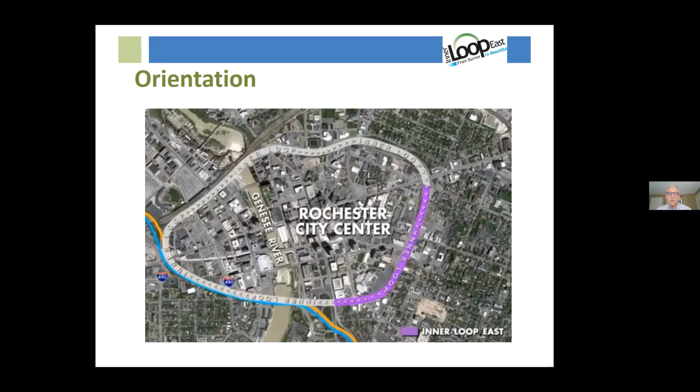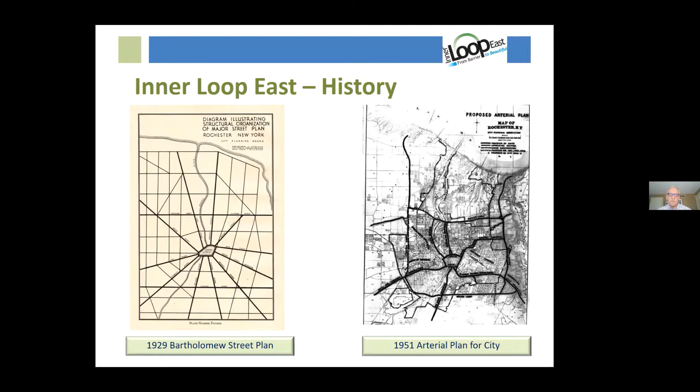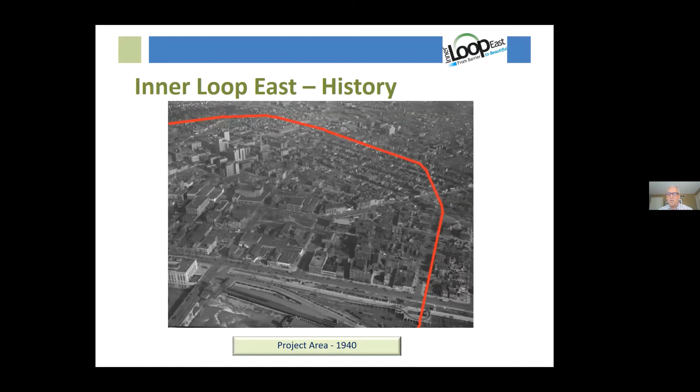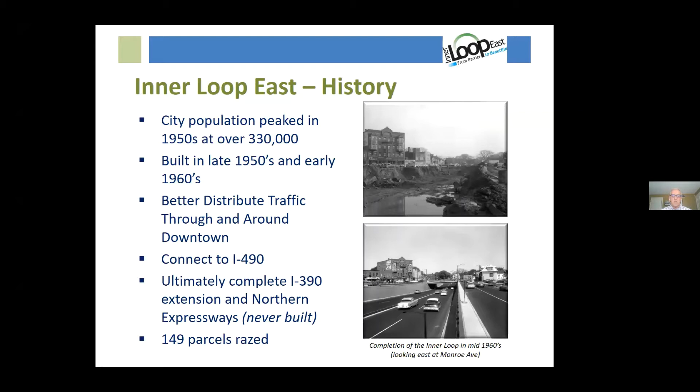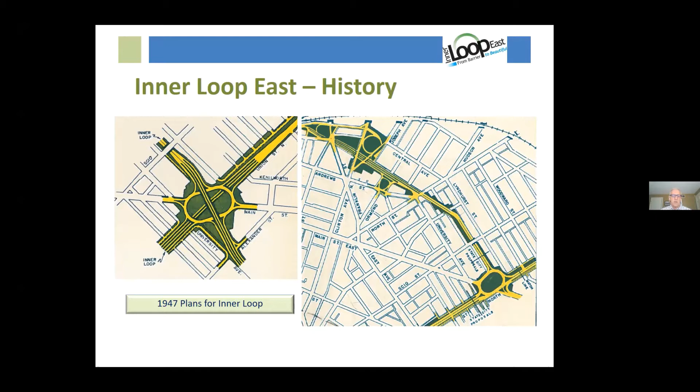I just thought this design was interesting that Eric found in the history and plans for the Inner Loop. On the left is the intersection of Main Street and University. As they planned it, it's kind of this crazy roundabout thing. I'm not sure which level is which, but from a historical perspective, that was back in '47—the Inner Loop was finalized in 1964. Obviously it changed to just a standard bridge, Main Street bridged over the sunken Inner Loop.

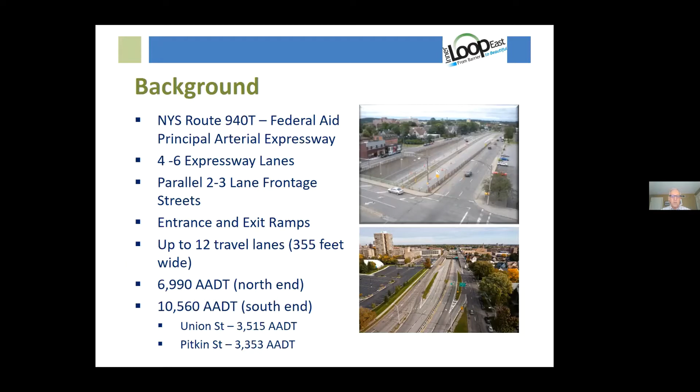And the traffic numbers—this is the geeky part—the AADT, which is the average daily traffic: at the north end, 7,000; at the south end, 10,000; and about 3,000 on Union and Pitkin Street. That's pretty close to the numbers we see coming down 2-lane Monroe Avenue every day. So obviously this road was way overbuilt for what was needed.

It had structural issues—geometric deficiencies, safety concerns, all the things you can see there. And it certainly depressed the land values adjacent to the road. You can see how that bridge under Broad Street had crates underneath it holding it up. Some of that was because we were hoping this project would get funded, and that's why we took that measure—we didn't want the state rehabbing the bridge and then five years later we'd be tearing it down.

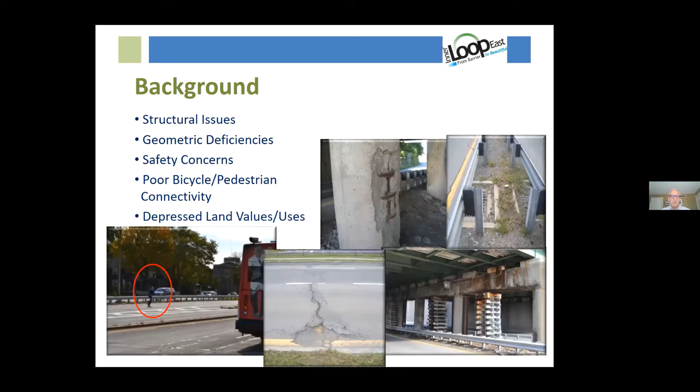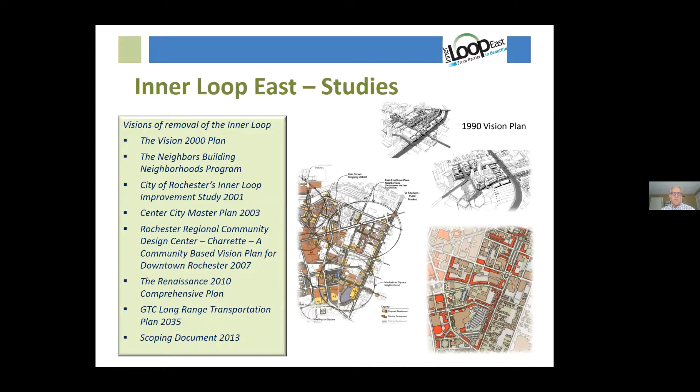The design center had a charrette in 2007—I was at the city at that time—and it was a great process to get some ideas about what that would look like. It made it into the city vision plan and, as importantly, the Genesee Transportation Council long range transportation plan, which is always needed to get funding for a state project. Scoping documents were completed in 2013 and had made that recommendation as well.

So why do we want to take it down?

Pretty obvious reasons and placemaking reasons: reconnect neighborhoods with the center city, create a mixed use infill development site, enhance a bike-ped environment, improve livability, and try to remedy a mistake of the urban renewal era, and then right-size the overbuilt infrastructure. As we've talked about, it was just way too much road for the traffic.

So in comes the Tiger Grant, and as part of that we did some benefit cost analysis, which was required to get Tiger funding. You can see what the benefits were there. Using the federal discount rate, you had to get to a number close to 2. We got there, and so it was thought possible to move ahead and get Tiger funding for it.

It took us 3 times to get the funding. We worked with Stantec to help us refine. They were the folks who had put the design plan together, and we worked with them to refine our application a little bit better based on feedback from USDOT. We requested $17.7 million for that project.

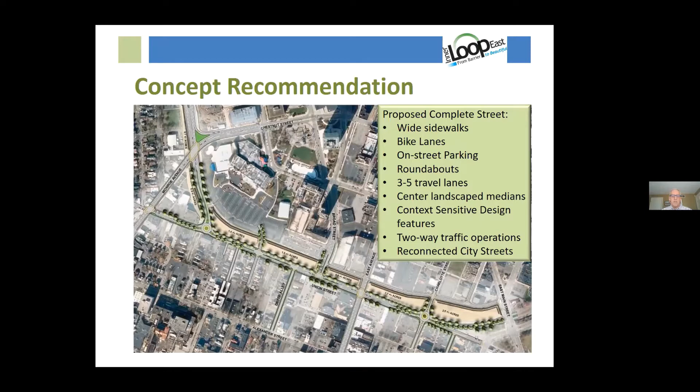So the final design, we kept most of those things. A two-way cycle track was added because there was a lot of input from the bike folks about how this would be a great place to do it, and we had the space to do it.

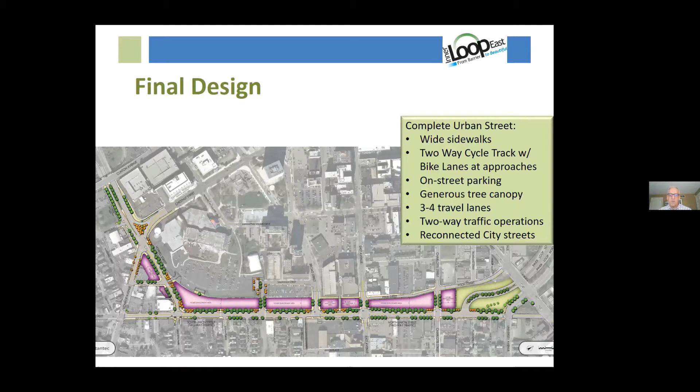We reconnected all the city streets. Talking to the folks at Stantec and the folks at the city who worked on the project, I think if we had a do-over, seeing how it runs, and this is certainly something that could happen in the future, we would like to have seen this cross-section. We would have liked to have had the island still in there. The elimination of the median was replaced with a 3-lane section.

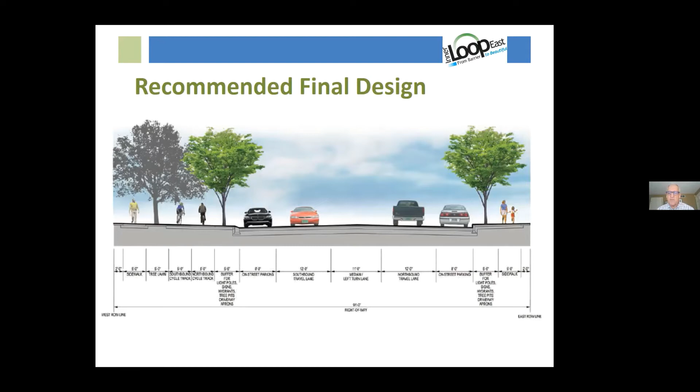This was thought to allow turns. The reality in hindsight, as we talked about back and forth, is that only Gardner Park in this section provides connectivity to another street. Many of the streets along that section are dead ends. So providing that turning lane could have been done another way. We can still do that, certainly no reason why we can't, but funding is always difficult for redos of these kinds of projects.

So here's the inner loop during construction. Construction went well. We had the benefit of Union and Pitkin Street through the whole construction period, so we didn't really disrupt business or traffic too much to put it in, and as you saw, there wasn't much traffic on it in the first place.

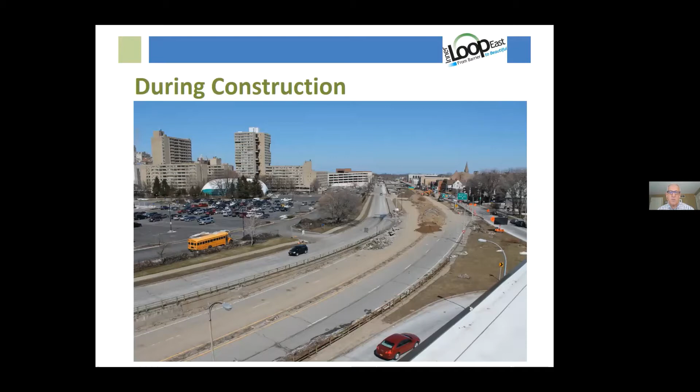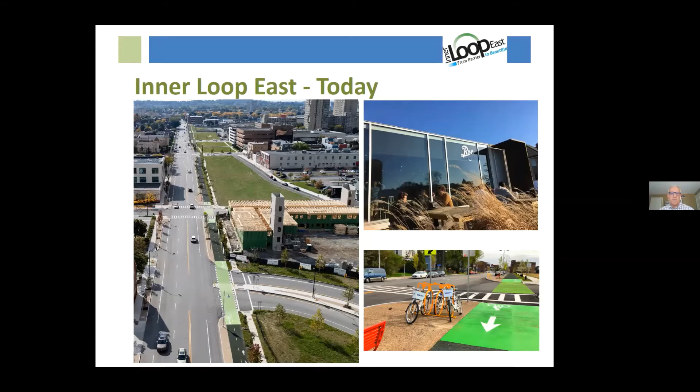And here's the inner loop east today, well actually probably a couple months ago, because there are more buildings going up now. Those seen here are some of the new buildings that are completed: the corner at the top left is Charlotte and Union, and at the corner of Broad and Union on the lower photo, and then the existing ROC Brewing, which has nice parking in front of it, and people can access it from both directions, which is great.

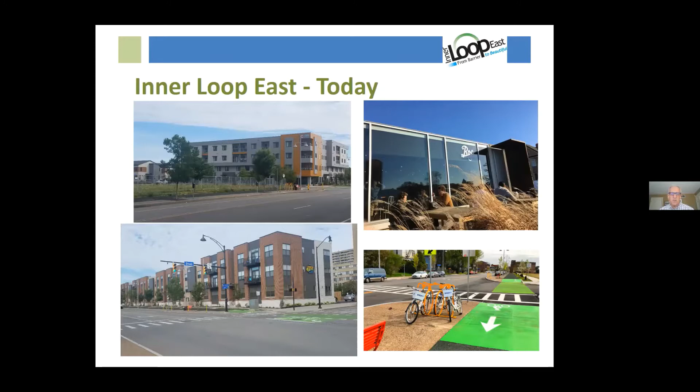So what happened then? We did this thing, we freed up 7 acres of land. When does the placemaking kind of things, the building and the street infrastructure that happens, how does that happen?

So land use and design studies were done. Public meetings were held on development goals. First RFPs went out in 2016. First building permit was issued in 2018.

We had a complicated land acquisition from the state back in the late 40s. The state and the city partnered and bought the land jointly. So you would think it would be easy for the state to turn that over to us, or for us to work some kind of deal out, but the survey, design, and money that had to change hands for that to happen was a large effort. The development wasn't going to happen until we could do that, so the city was very energized to get that done.

And then the first certificate of occupancy was issued in late 2019, and all of the parcels along that stretch are spoken for. So that's great.

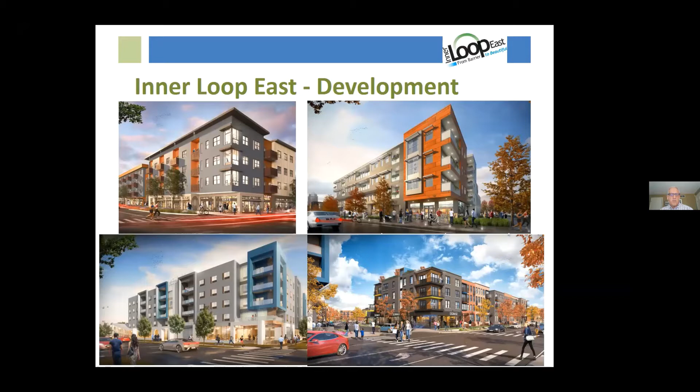But the other buildings have started, and here's a couple of photos of some townhouses, the extension of those ones you saw in the earlier photo, and a development on the other corner of East Avenue that is going up. That's going to be a great development.

On the left side, it's important to note that the Strong Museum took the impending project back in 2013 to heart. Through the work of their CEO, Rollie Adams, and CJS Architecture, they decided to develop a master plan. I think they were just happy to go along with a 600-space flat parking lot in front of their building, which was kind of a buffer for them from the inner loop. But once they realized a road was going in, I really give them credit, they went ahead with this master plan, which resulted in the recently completed Lego-themed parking structure, which made space for a hotel, the row housing, and will also line up with their continued development of more museum space and amenities like restaurants on campus, to make the Strong Museum truly a destination and really cement the placemaking along the street.

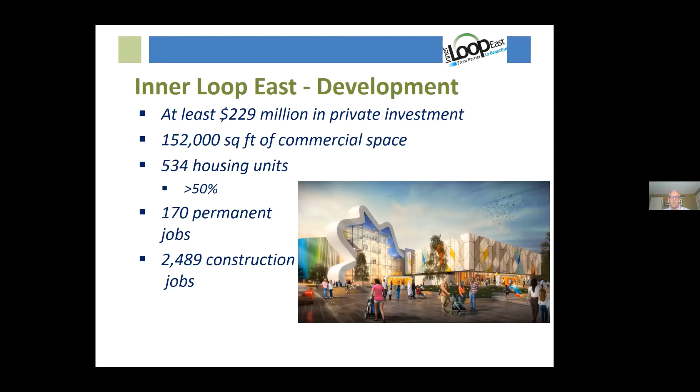I want to talk a little bit, because I think it goes along with placemaking and leads into what Eric will talk about with Inner Loop 2. I want to thank Brett Garwood for this information. I think there's this narrative about housing that any housing downtown is unaffordable. These are the numbers for Home Leasing options, which was a couple of those buildings I showed you, along with their Charlotte townhomes and some housing they have just off the loop on Charlotte Street, and it shows the affordable numbers for their housing.

I think it's impressive that we're seeing this affordability right within the downtown area and walking distance to where a lot of the jobs are. Brett had also reached out and talked to the other housing developers, and when you count all the projects in the loop, which is close to 600 housing units, a third of those units will be affordable to low-income households earning 60% of the AMI, area median income.

30% of the units are affordable for folks making between 60 and 100% AMI. 20% of those will be affordable to somebody who works and earns under $12.50 an hour. Rents are going to range between $450 to $3,000 per month. And 55 of those units are supported by housing for the formerly homeless or have project-based subsidy.

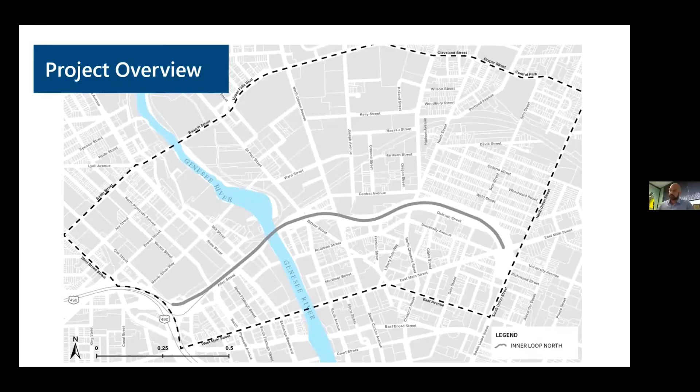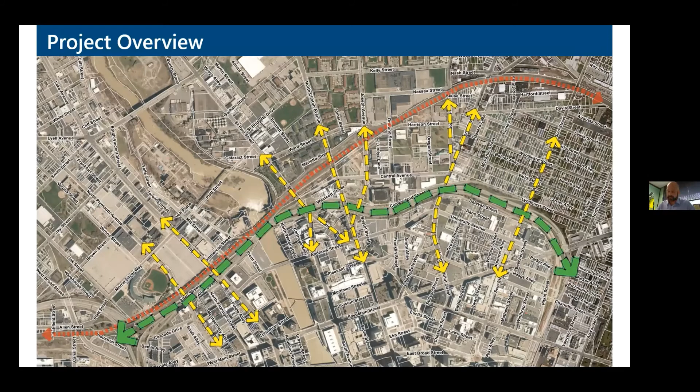Keep in mind that this is a planning study, the Inner Loop North Transformation Planning Study. It's a $1 million planning study, but it's a planning study nonetheless. The funds were secured by Assemblymember Gantt a few years back, and the project has been underway. Hard to believe now, it's been underway for what, 9 months.

This is not a design project at this time, right? It will result, think of it as an alternatives analysis. It will result in a preferred alternative or alternatives that can be advanced to design. There are no commitments. There is no presupposed outcome at this time.

The most important component is to listen to and work with the community through robust public engagement.

Goals of the project are to reconnect neighborhoods, just like we did with Inner Loop East, making it easier for bicyclists, pedestrians, and transit users to navigate our streets and better connect across the city and between neighborhoods. I want to restore a human-scaled street grid. Human scale is important, right? We want to design for people, not for cars.

We want to create a sense of place. That is what our Rochester 2034 comprehensive plan is all about, right? Placemaking. We see this project as critical to that effort.

We want to integrate with ROC the Riverway, our other major investment program that we have going on. You may not realize this, but the Inner Loop does cross the river, right? You may not notice it as you barrel across the expressway at whatever speed you're comfortable going at, but it does, and that expressway bridge does form a formidable barrier between downtown and High Falls, and makes it difficult for us to complete the Riverway Trail system along the river.

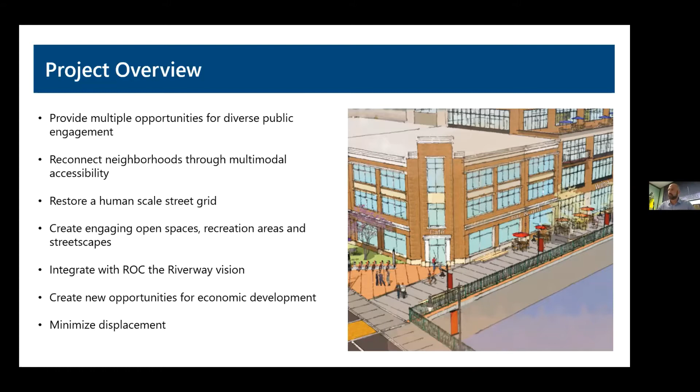And we recognize, of course, there are people who live and work in this area today. We want to make sure that whatever we do here supports them and discourages displacement, minimizes that by coming up with strategies to ensure that people can live and work in the neighborhood.

Although it's a City of Rochester project, it is led by a consultant team. We have engaged the services of Bergmann Associates as lead consultant. They are being assisted by Kimley Horn, Trowbridge Wolf Michaels Landscape Architects, SAA / EVI, LU Engineers, and RIT Center for Urban Entrepreneurship, all assisting Bergmann with different specialized skills for delivering this project.

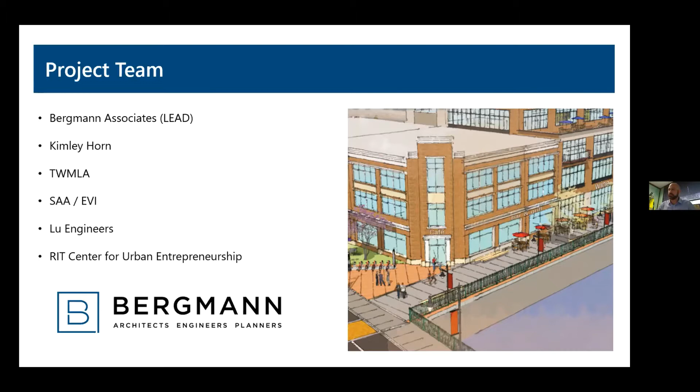Central to this project is the community engagement strategy. What you see here, this is the intent of what we're scoped to do. Obviously, conducting public engagement in the midst of a pandemic is a bit challenging, to say the least.

We are active online and on social media. We have obviously not been able to get out and do the pop-up events, public meetings, and other things at this time that we had hoped to achieve by now, for obvious reasons.

However, we are making plans to get out there now that our area has been approved for gatherings of up to 50 people, I believe. So we're making plans for some small group type events in the very near future, so that we can start moving our engagement strategy forward.

A project as large and complex as this requires technical expertise, so a technical advisory committee has been convened. It involves representatives from multiple city departments, Monroe County departments, New York State Department of Transportation, RGRTA, Genesee Transportation Council, and others to provide direction, technical feedback, review materials developed over the course of the project, consider public input, and assess the various alternatives, ultimately leading to the preferred alternative or alternatives.

We've also convened a community advisory committee with over 40 stakeholders from the project area, including residents, property owners, business leaders, advocates, institutions, etc. The goal is for the Community Advisory Committee to help build trust in and support for the project, providing perspective on alternatives and recommendations, and helping promote engagement in the community. We want to reach all corners of our community and get the most possible voices heard.

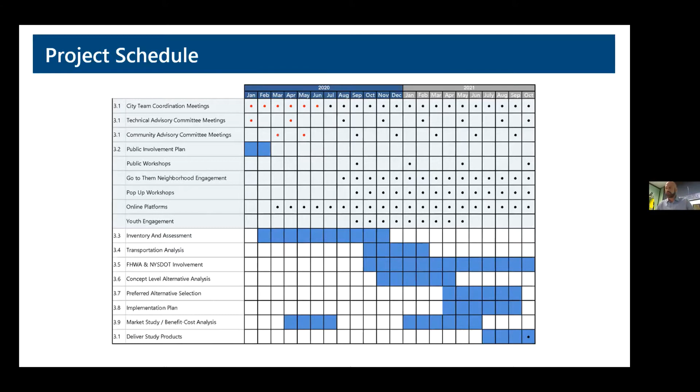So we'll also be able to begin conducting public engagement on a more face-to-face basis. We're now looking at a fall 2021 completion, meaning we will have a preferred alternative or alternatives to then advance to the formal scoping and design process. This is the general scope of work.

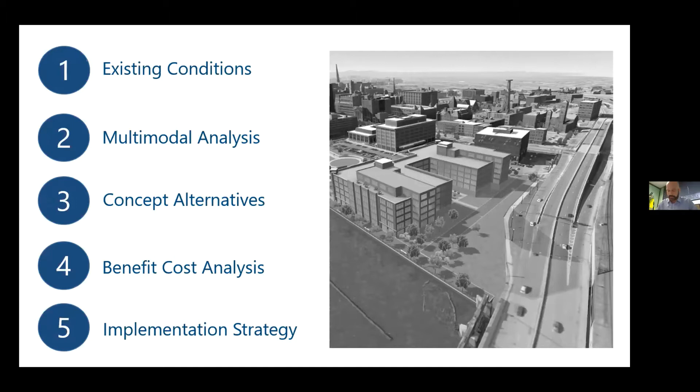I'm briefly going to describe this, mindful of the time. The first step is to understand how things are today, so we're going to look at land use and zoning, traffic data, structural conditions, environmental conditions, etc. that exist today. This gives us an idea of how things currently are, so when we look at choosing alternatives, we can benchmark against what exists today and forecast out to what we may experience in the future.

Some examples: this is current estimated traffic volumes in the corridor. You can see going from east to west, traffic picks up substantially. These are estimated volumes, or the most recent actual counts, not counts conducted directly as part of this project since we haven't been able to do that yet. This project will do in-field data collection, which will revise this, but it gives a good idea of what's out there today.

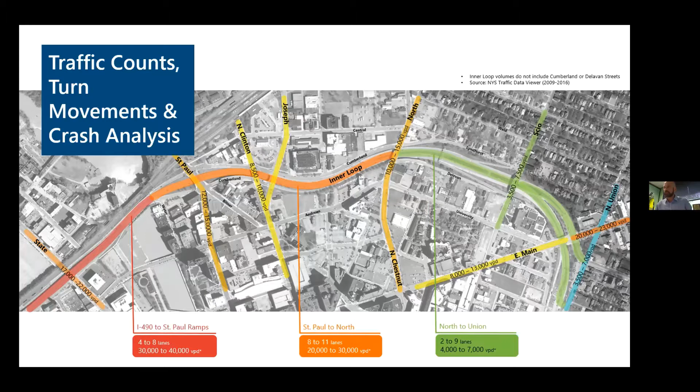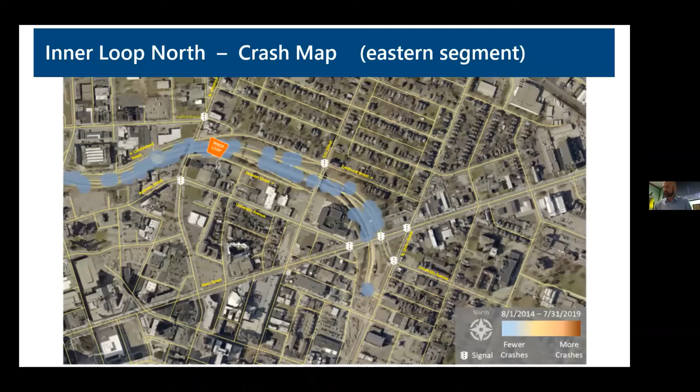Since one of our primary goals of the project is to improve conditions for bicyclists, pedestrians, and transit users, a thorough multimodal accessibility analysis will be conducted that will help us propose alternatives to achieve the goal of multimodal accessibility.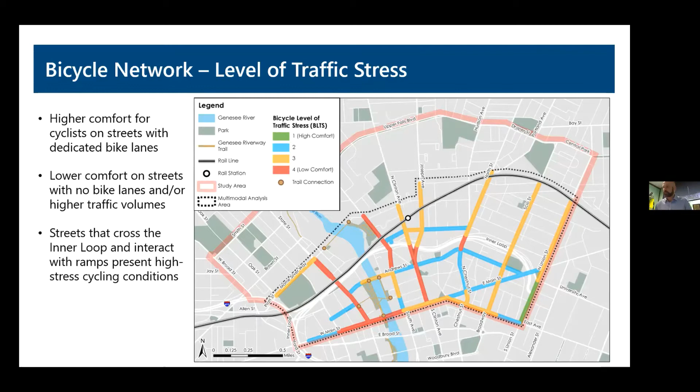This slide gives you an idea of what we'll be looking at. One example is the bicycle level of traffic stress in the project area. Red means lower comfort for bicyclists, and green being high comfort, based on a number of factors. This gives you an idea of what we'll be looking at as part of the multimodal analysis for the project.

Jim mentioned Inner Loop East. A market analysis will be doing the same type of work as part of this. The market study will inform the scale and type of development that could occur if and when the project moves forward. I'll note that the market study completed for Inner Loop East turned out to be extremely accurate. I think the overall scale and density of development we're currently seeing out there is consistent with the market study produced for that project at that time.

It's really helpful for us to get an idea and to plan ahead for what could be. So it's great to see that work was such a success.

The market analysis then leads directly into a benefit cost analysis, which seeks to answer the question: will the project benefits justify and exceed the project costs? It's a federal requirement now for any competitive federal transportation investment programs.

It was a hugely important factor in our successful award of federal funding through the TIGER program for Inner Loop East. That project, as you saw earlier, had a roughly 2 to greater than 2 to 1 benefit cost ratio. And I think if you look at the numbers today, it's even higher than that based on actual project costs and actual benefits seen so far. But that's just me pontificating—don't quote me on that.

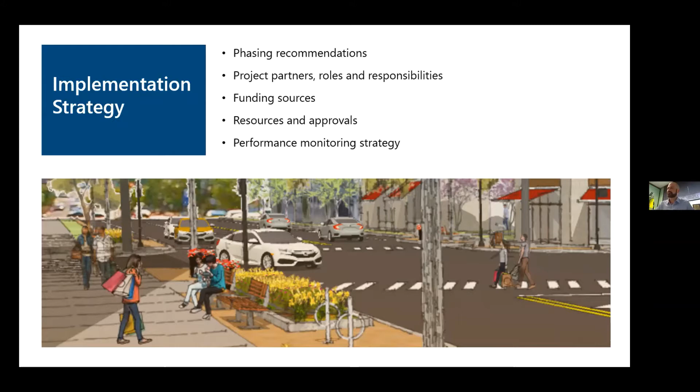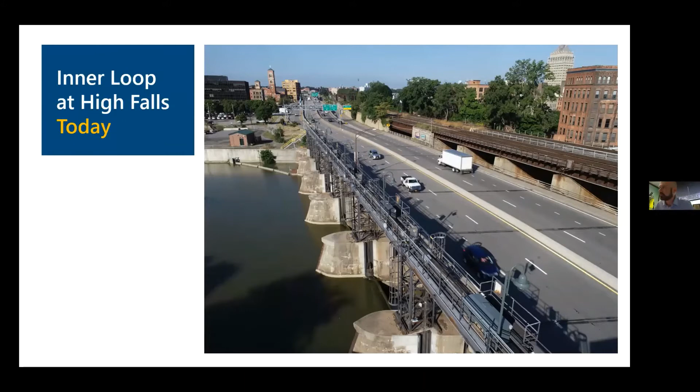I thought I'd close with some high-level concept visions. As I said earlier, these were produced early on by the consultant team. These are not actual proposals, they have not been evaluated against actual data, but they are great ways to get us thinking about what could be in the corridor—looking at some potential areas along the corridor and what some ideas could look and feel like. So this is a picture of the Inner Loop Bridge over the river, with the Central Avenue Dam right immediately adjacent to it.

Maybe there's a way you can bring the bridge more up to a street scale from an expressway, provide a two-way bike facility, making it better as a street connection. Then you can interconnect with the street grid, as you'll see over to the west there—you can see where Mill Street comes in. That's one example.

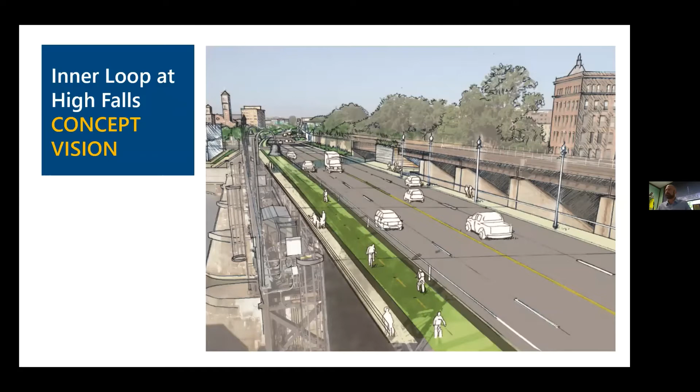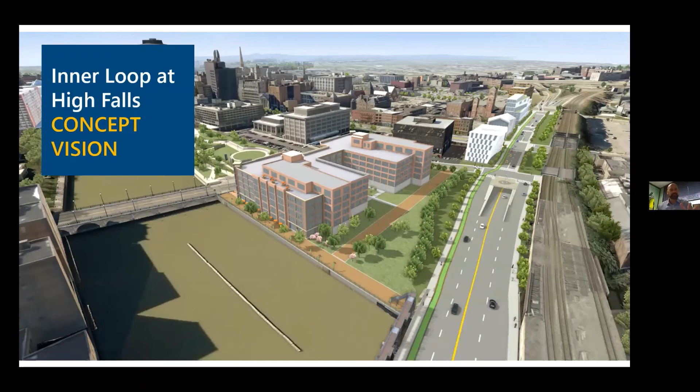There's another example: maybe there's a short tunnel section. Doing so would enable us to reconnect other streets and create further development along the corridor. Again, not an actual proposal at this time, just things to get you thinking about what could be.

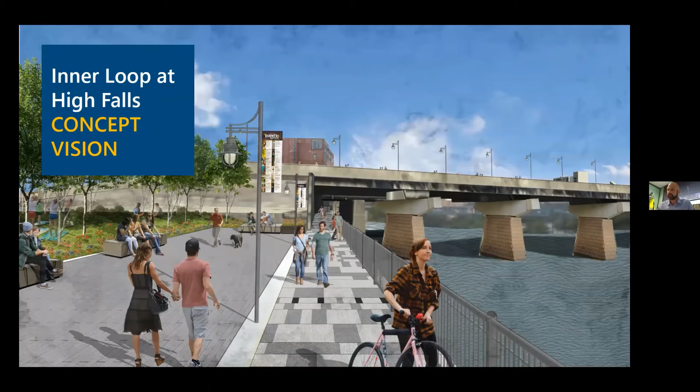What if the bridge, no matter whether it's rebuilt or otherwise, were raised? Would we be able to complete the trail system, put it right underneath, and directly connect into High Falls through there? It wouldn't ultimately look exactly like this because we've got the Central Avenue Dam right there and need to preserve that, but this again gives you an idea of what could be.

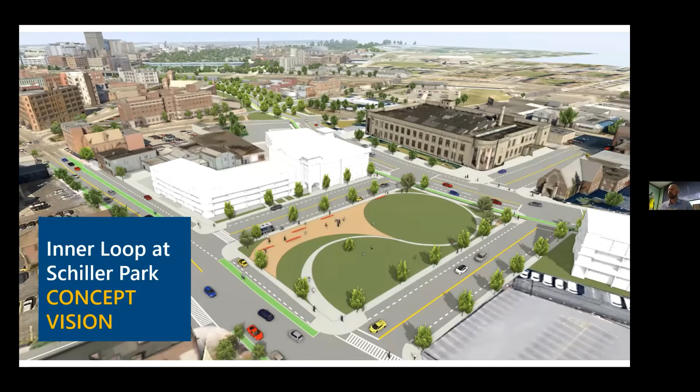Over by Schiller Park, or formerly known as Franklin Square, a kind of moribund park next to a reclaimed brownfield site and adjacent to this expressway—well, if we eliminate the expressway and clean up the properties immediately to the west, which we are in the process of doing, maybe we can not only reconnect the street grid but expand that park and develop mixed-use properties that frame that park space, as well as address the street, creating a much more rich urban environment through here. It's another view of what could be in that area. This is Cumberland Street, right?

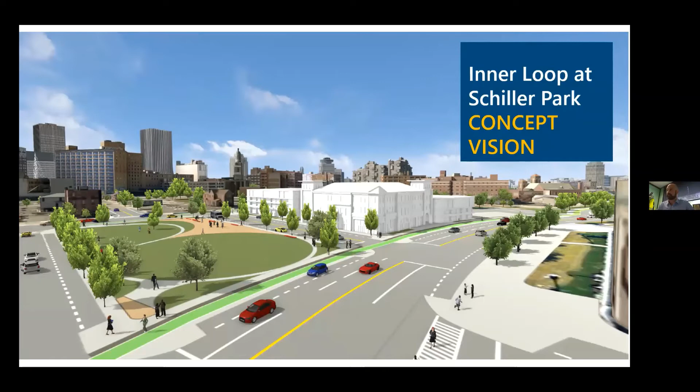And another would be over by World of Inquiry School. The school does not have playing fields. It's hemmed in by the inner loop and by the surrounding street network. But if the expressway came out here, maybe they could have playing fields and green space that could also be actively used by the community as well. So those are just some examples of things that maybe we could look at. Again, nothing that's set in stone, but all things that we can look at.

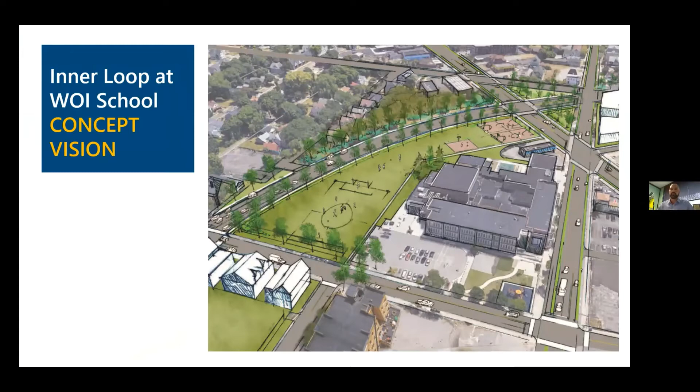Good afternoon, everybody. It's really nice to be here again. Well, actually, I wish I could be there in person. I really enjoy my visits to Rochester.

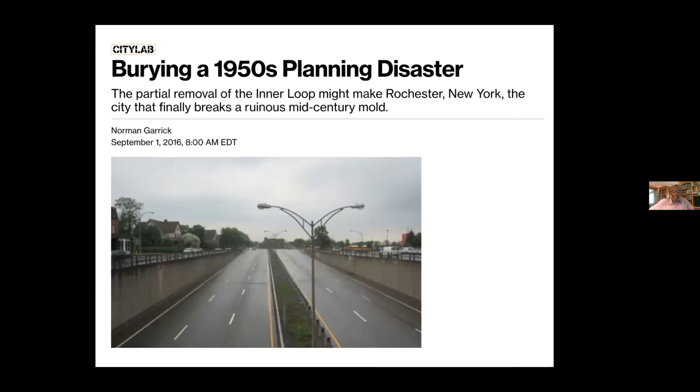So around 2014, 2015, I made three different trips to Rochester to give talks. And I was so excited when on one of the trips I saw the mud being taken from the lake and being dumped on the freeway. And I got really excited and I went back and I wrote this article for CityLab. And it became, for weeks, the top read article in CityLab. And it's interesting because it really shows the national interest in what is being done in Rochester and the national interest in this issue of freeway teardown.

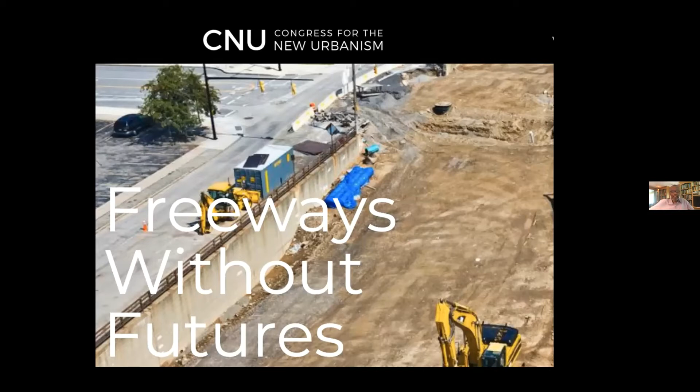And this is represented by this report from the Congress for New Urbanism, which each year puts out Freeways Without Futures, and they get up to 60 or 70 entrants from around the country trying to get on this list. The thing about Rochester is that there are lots and lots of people talking about removing freeways. You have actually done it, and that's why this is so exciting.

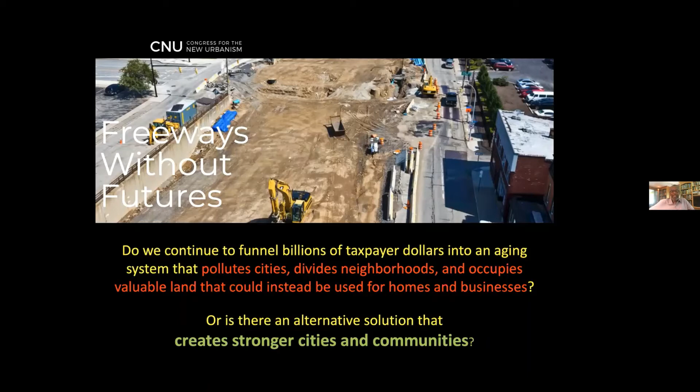So to take a quote from the Freeways Without Futures document, this is what they said we are trying to achieve. We need to stop continuing to funnel taxpayers' dollars into an aging system that pollutes cities, divides neighborhoods, occupies valuable land that could be used for homes, businesses, etc. We need to look at alternative solutions, and that's exactly what we're here for. We need to create stronger cities and communities.

So that's our task. How do we go about creating stronger cities and towns in our country? How do we go away from the disastrous experimentation of the 1950s, 1960s, and 1970s to start creating places that people can love and live and have a high quality of life in again?

And this is probably why we are in the strait that we are in right now. So I think it's really important to understand why you have been able to make progress in Rochester in moving forward. And one of the reasons is I would credit the Design Center. There are not many cities in the country that have been able to get such an elevated discussion going about urban planning. And that comes from having a center such as the Design Center, which brings in expertise in all the different areas that must come together in this very complex field of endeavor.

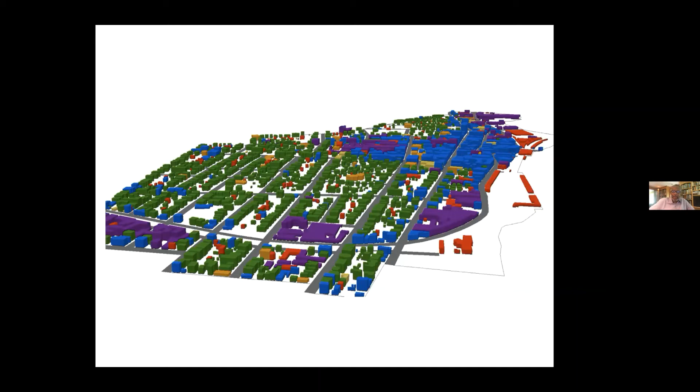This is Bridgeport in 1913. This is Bridgeport now. It's hard to recognize that this is the same place. And we can see a lot of the damage that was done.

For example, this was a city that could pay its way. Most of the buildings you saw here were taxpayers. In this picture, the only taxpayers are the buildings in blue. So no wonder the city goes bankrupt—everything else is on the dole in this city.

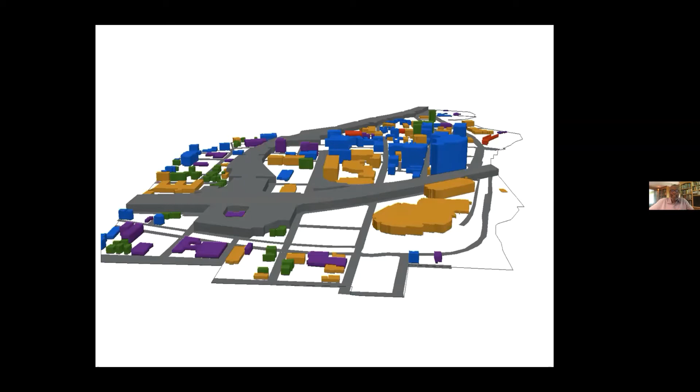So this is what we have created: 62% of the land area in this city is devoted to car storage or car movement. Rochester is not much different from this, and the transition that went on in Rochester is not much different from what you see here. So what we're trying to do is get back to a city that is more functioning than what we have created.

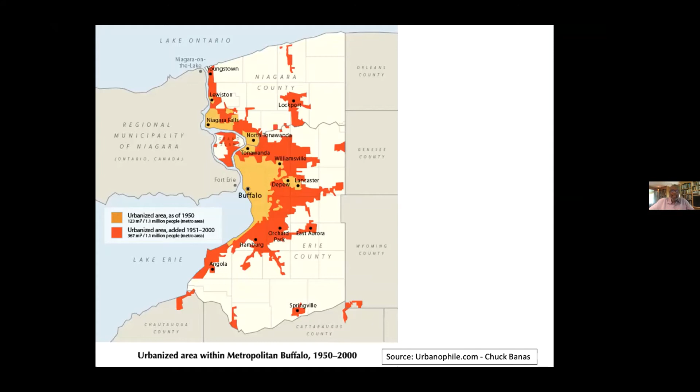Another set of statistics that, again, I haven't done for Rochester—this is from Buffalo, New York. In orange is the extent of the Buffalo metropolitan area in 1950. In red is the extent of the urbanized area in 2000. And you would think that with this explosion in land being used for the city, there would have been a corresponding explosion in population.

This is what has actually happened in Buffalo. That's the increase in land. That's the increase in population, or lack of increase in population. I am virtually sure that a similar analysis of Rochester would show exactly the same thing.

This is the definition of a stagnant place, a place that is past its glory, but that doesn't mean that a new day of glory could not come. In addition to what happened with the entire metropolitan area, this is what happened with the city of Buffalo.

Population went from 600,000 to just over 200,000 right now. So we had an explosion of the metropolitan area without an explosion in population, and we had an implosion of the city. So basically we were moving people from the city of Buffalo out into the surrounding areas.

Why this is a disaster, why this is a problem, I'll ask you to think on this map, the area in which you live, and think of the cities and regions that are doing well. Think of places like Chicago, Toronto, Burlington. Those are all places that have strong inner cities. If we are going to have these northern tier New York cities come out of the doldrums, we have to find some way of restoring the character, the vibrancy of the central city. It's not going to happen with continued growth only in the suburbs.

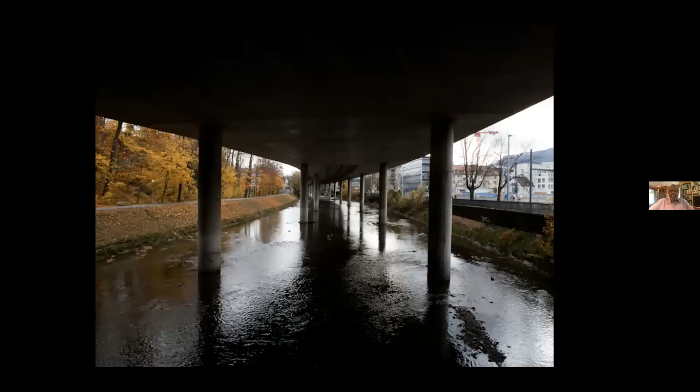Again, they made decisions in the 1970s to change the direction they wanted their city to move into. And some of the implications of that, one of the big implications, has to do with people being killed on our city streets.

In Amsterdam, the chance of being killed by a car if you were a pedestrian was 2 times the rate in the US in 1975. Today, the difference is a 20-fold difference between the US and the Netherlands. So just to show one impact of this change that this city underwent.

Just one example from Zurich: the average cost of transportation in the US is about $9,000. In Zurich, a very, very rich, wealthy city with a much better transportation system based on the tram, $4,000 per year is about what you would spend for transportation.

So we need change. And I am really excited to see this discussion about the North Loop, discussing the issue of going back to the street grid. This is really the way to go, but it's also a difficult issue, because how we create street grids, we knew how to do it 200 years ago. It's never taught in schools these days. So it's going to be really difficult to really do it right, but it's exactly what is needed today.

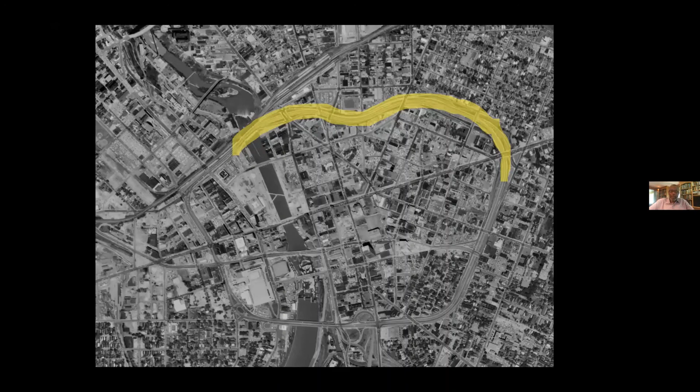This was built with the idea that we were going to concentrate traffic. That is what freeway building was about, that you would concentrate traffic. I can't tell how many times I've gone to cities around the country, I've gone to LA, and most of the grid is empty of traffic. All the traffic is on those roads that lead from the freeway to the garages. This is what freeway building was about, and it was a misunderstanding of how traffic worked. So it was about concentration.

What we have done with the freeway building is that we have concentrated the traffic onto the freeways and just onto those streets that lead to parking garages, and it starves other streets of traffic, of the lifeblood that they need to survive. What I'm hoping with this project that we will see is a going back to the grid. And I mean that in every way, in that we don't need to have a replacement for the inner loop. Once we get rid of the inner loop, the traffic that used to be on the inner loop is just going to disappear into the grid. So we need to start from that perspective, that we are using network thinking for this project.

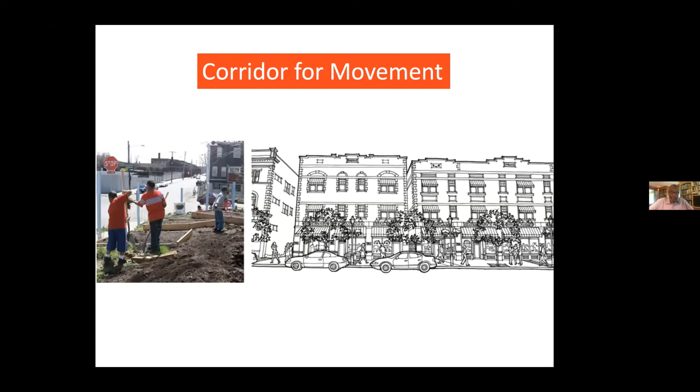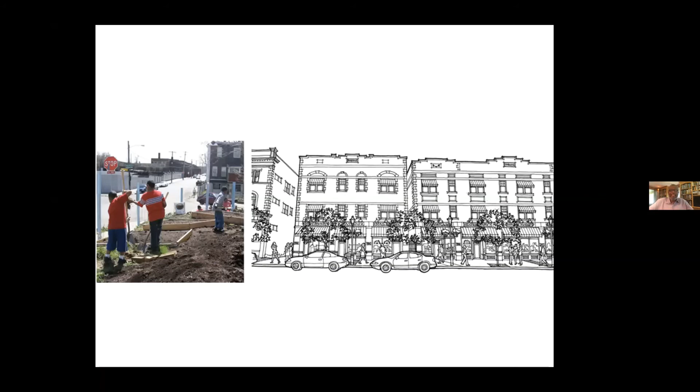And I would end by saying what we really need to be focusing on is not the corridor as a replacement corridor of movement, albeit a somewhat better one. But what we need to be doing is focusing on placemaking and looking at the grid, looking at how we can use the grid to do what we need to do in terms of the type of living, the type of commerce, the type of civic engagement, the type of parks, etc. So really, this should be a project about placemaking first and foremost, and not about corridors for movement.

So that's all I have for you. And I just leave you with this statement from the 1960s, where Lewis Mumford reminds us that a city exists not for the constant passage of motor cars, but for the care and culture of man. And I think that needs to infuse anything we do in this project. Thank you very much.